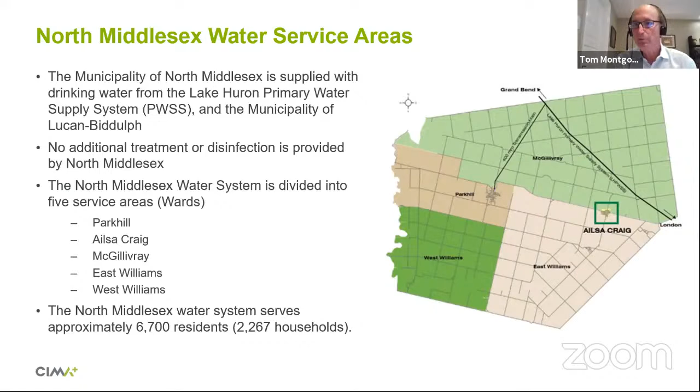So you can see here, I'm just going to try and hide this. There we go. With the map, it shows some of the service boundaries, with Ailsa Craig up at the north end of East Williams. One of the reasons to show you this today is to look at some of the options and potential that this location for water storage could have in terms of emergency supply beyond Ailsa Craig within the service area itself.

The overall distribution system for the North Middlesex water service areas is shown here on the map. There are 5 secondary connections to the Lake Huron primary water supply system, and 3 intermunicipal connections for emergency: an emergency connection to the Thedford water system, the Lucan water system, and South Huron water system. And just a summary in terms of total flow coming into North Middlesex for 2019, the full year, there was 1.35 million meters cubed, roughly 300 million imperial gallons.

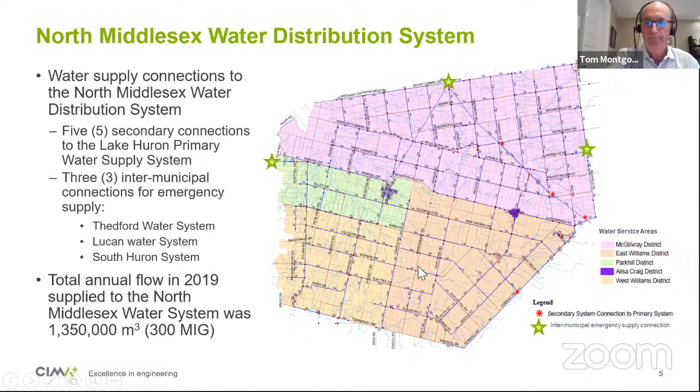With the existing storage facilities, just a recap of what's available today: there are 2 existing water reservoirs that provide storage capacity for Parkhill and West Williams water service areas. The Mount Cameral Reservoir at 450 meters cubed, fairly small, and then the Parkhill Reservoir at about 1,100 meters cubed capacity. There are no water storage facilities for Ailsa Craig and the surrounding areas, which leaves these areas vulnerable to water shortages, pressure fluctuations, and service interruptions during shutdowns of the Lake Huron primary system.

The Parkhill Reservoir on its own has about 12 hours of average day demand storage, during an emergency or scheduled shutdown of the Lake Huron primary water supply system. That's on the assumption that the reservoir is filled at the beginning of that emergency event.

Within the Lake Huron primary system, there are 3 existing reservoirs that provide water storage capacity throughout its primary area. McGillivray Reservoir is about 18,000 meters cubed capacity, one of the larger ones outside of Arva. The Exeter-Hensall Reservoir is about 8,000 meters cubed capacity.

So the McGillivray Reservoir and pumping station is primarily used for boosting water from the Lake Huron water treatment plant to the Arva Terminal Reservoir during high demand periods. The McGillivray Reservoir currently has up to about 12 hours of average day demand storage available during an emergency or scheduled shutdown of the primary transmission main. That's good news, there is storage available when the main pipeline goes down, but it's a matter of how that water storage gets distributed to the customers.

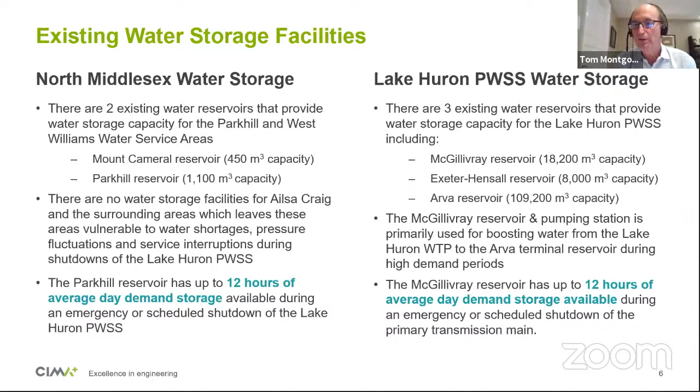Overall, just some information with regards to how many shutdowns the municipality's encountered over the last few years. We put together a list from 2017 to 2019, showing that over the last 3 years there's been 39 emergencies requiring some level of shutdown in the supply system to Ailsa Craig.

The supply disruptions over this period have had major impacts on Ailsa Craig and the surrounding area because there is no storage available. The additional cost over the past 3 years for providing emergency supply to Ailsa Craig and the surrounding areas during those shutdowns is estimated at about $400,000, which is not sustainable in the years ahead.

There's a breakdown of the annual costs that have been recorded with regards to some of the larger shutdowns within the system. Some of these costs include the time for the operator, as well as the cost for hauling in water on some of the larger shutdowns.

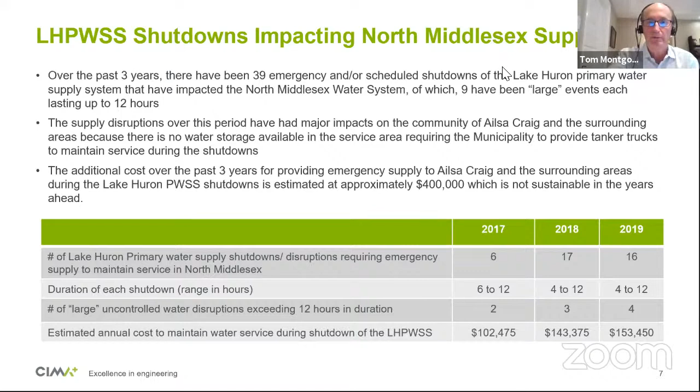So the water storage needs for the supply to Ailsa Craig is currently serviced by an 8-inch water main connection to the Lake Huron primary transmission main, downstream of the McGillivray Reservoir and booster pumping station. As I mentioned earlier, there's no water storage facility in Ailsa Craig for fire protection or emergency supply.

In 2019, the Class EA study was completed for North Middlesex, and that identified a storage deficit in the Ailsa Craig water service area and recommended construction of a new elevated water storage tank to meet current and projected water storage requirements. Based on the 2019 average day consumption record for Ailsa Craig, the minimum storage capacity required to meet ministry guidelines, that's the Ministry of Environment, Conservation and Parks, is about 1,600 meters cubed.

There's a breakdown of the components of that storage. Equalization, that's the working volume within your water storage facility to maintain circulation in the tank and between high and low water under normal operating conditions. You'll have fire storage of 724 meters cubed, based on a level of fire protection by ministry guidelines of about 100 liters per second fire flow for 2 hours. And then there's some emergency storage as well, for 312 meters cubed.

Within the Lake Huron system, they recently completed a master water plan, done in 2020, and that identified a storage deficit of about 700 meters cubed in the McGillivray Reservoir under normal operating conditions by the year 2038. So it's within the design period we're looking at as well.

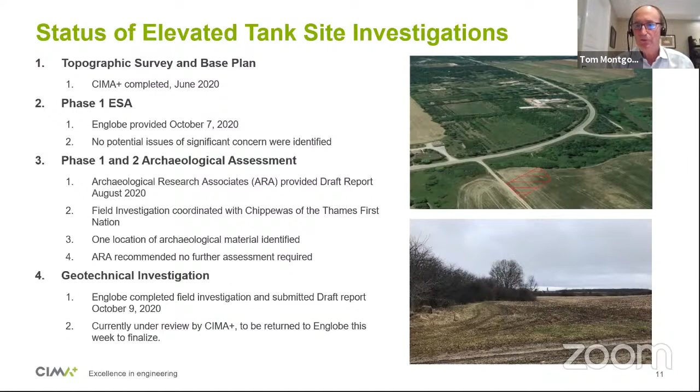That's just an aerial photograph of the site itself and the actual existing conditions of the site where the water tower will actually sit.

So scope of works for the elevated tank, I just put a quick outline here of what we'll be looking at in terms of the contract specifications and the tender documents.

Mobilization and site preparation work, which should be the environmental work, will include topsoil stripping of the site and any removals of brush or trees that are in the way of the structure. Then we'll be looking at the construction itself, an elevated storage tank with a minimum working capacity of 1,600 meters cubed.

That would include a ground level valve room, potentially an upper valve room, piping within the structure and the tank, protective tank coatings, and all related tank appurtenances and accessories.

So we're looking at a 300 millimeter diameter inlet. We'll also have outlet water main connections, valves and appurtenances, and overflow piping, drainage piping, and outlets.

We've also incorporated a bulk water filling station, that's for haulage of water where trucks can come in and fill up with water. There'll be a system established in terms of billing and access to the customers looking to fill up with bulk water. We'll also be looking at instrumentation, electrical, SCADA, and mechanical works.

The site works itself will include grading an overflow retention area to contain some of the overflow from the tank through various operations, yard piping, asphalt entrance, driveway and parking area, some minor landscaping, fencing, and entrance gate. Then there'll be site cleanup and restoration, and testing, commissioning, and final completion of the project and handover to the municipality.

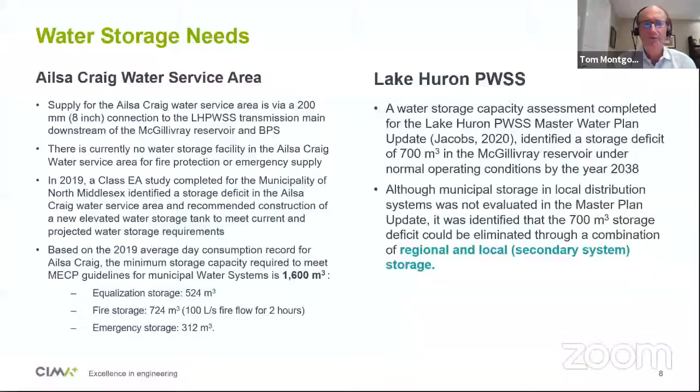Oops, sorry, my finger's a little fast there.

We'll have a new access driveway, which will basically be constructed within the existing easement where the pipeline is for the connection to the Lake Huron primary water supply system.

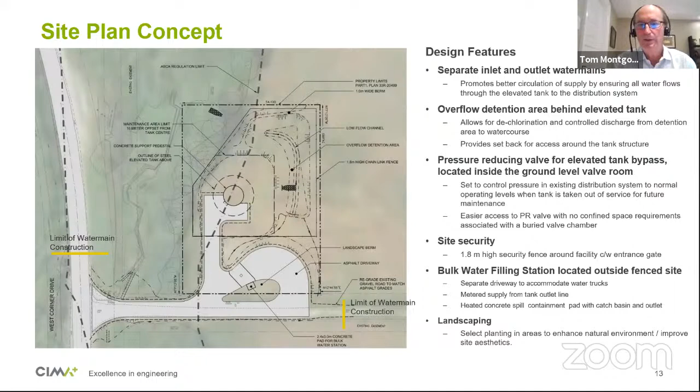And again, the bulk water filling station will have its own separate metered water service connection off the outlet main, so that those customers who want to fill up will be able to record the volume of water used, and then the municipality will be able to bill them accordingly.

So here's an idea in terms of what the tank is looking at, or is proposed at this point. We're looking at a concrete support pedestal supported on a concrete foundation, which will bear on native soil, roughly about 4 to 6 feet below the grade of the existing ground. We'll be looking at a separate inlet-outlet riser, which will take water from the ground through the pipe outside in the yard pipes, and take it right up to the elevated tank.

So the water will come up through those jets and circulate around the entire perimeter of the tank on the inside. And then the outlet portion will be a pipe that'll draw off the bottom level of the tower, and it'll be a separate line. So we can ensure that all the water going through the tower will actually be well circulated, and we will be drawing fresh water out from the tower back into the village. So everything that comes into the tower will go back to the Ailsa Craig community for service under normal operations.

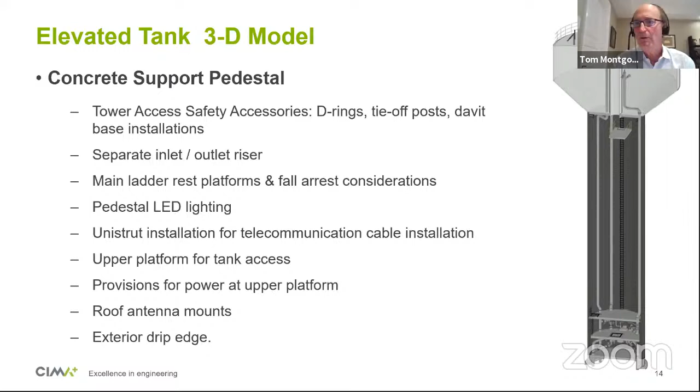We'll have an exterior drip edge on the tank, which will be outside, and the drip edge will likely just be above the cone section in here. What that does is it tends to move any water accumulation on the tower or from the roof, and pushes it away from the cone section and onto the ground. One of the problems we've had in the past with the towers is that if water accumulates on the cone section, it can stay there for a period of time because the sun doesn't always hit it, and you can get a growth of mold and a green color that discolors the tank and makes it look like it's rusting. So the drip edges we put in now around the facility, right around the circumference, help mitigate against that.

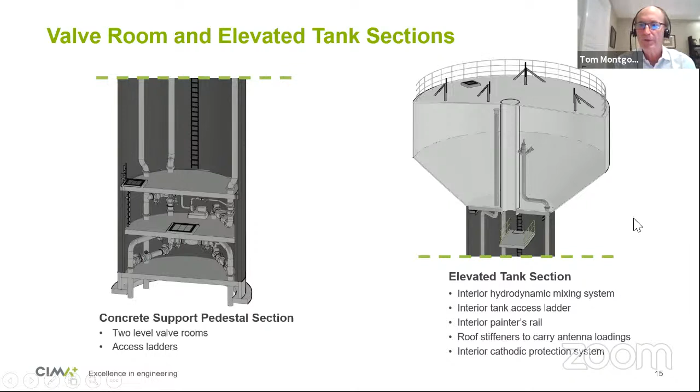We also have an overflow pipe in the event that the tank should ever be overfilled. That would capture the water at this point and take it down a dedicated overflow pipe out to our detention area itself. So some of the features that will be included would be the hydrodynamic mixing system.

There's the interior tank access ladder, which will be from the top, so that you can enter the tank from the top level for inspection purposes in the future. There'll be an interior tank painter's rail as well, so that any scaffolding requirements for future maintenance will be readily hooked up to that system, providing complete access inside and outside the tower itself. We'll also be looking at roof stiffeners to carry the antenna loadings, because there's a lot of wind force on antennas depending on the type. So we want to make sure everything's accommodated for those future installations.

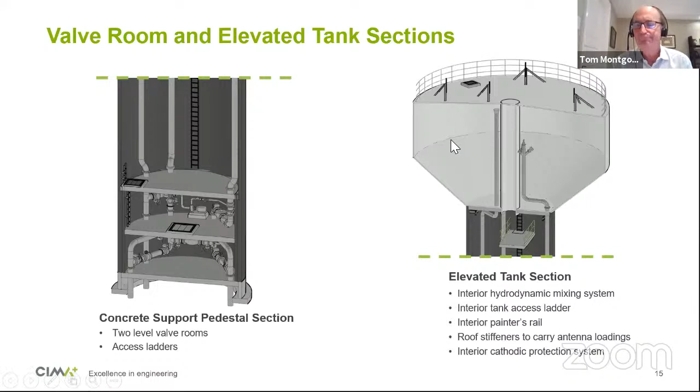We'll also be looking at an interior cathodic protection system. That's a backup to the coating systems, to protect against any type of corrosion should there be any localized failure of the coating inside the tower, or any other potential areas where there could be some rusting in the future.

The interior valve rooms and the layouts we've shown here are just two sort of clips. The inlet tank level control will be on the main pipe coming up. There will be a meter on that line which will record the flow on a regular basis. We'll also have a control valve that will allow us to modulate the flow rate into the water tower, so we can devise separate operating scenarios for winter versus summer operation.

In winter operation, you want to make sure your tank fills at a lower rate so that you get continued mixing within the tower. In the summertime, you're looking at a much quicker fill rate because you've got higher demand, lawn watering, and other issues within the municipality that tend to turn over the tank a lot faster. So we want to make sure we can replenish the water at a much faster rate during those hot summer months. I think I've talked about all the appurtenances already, so we'll move on.

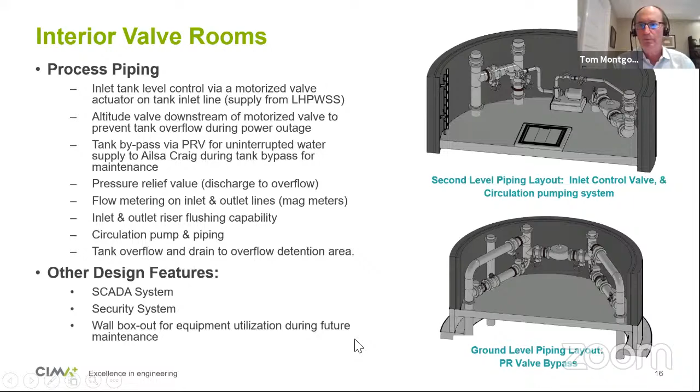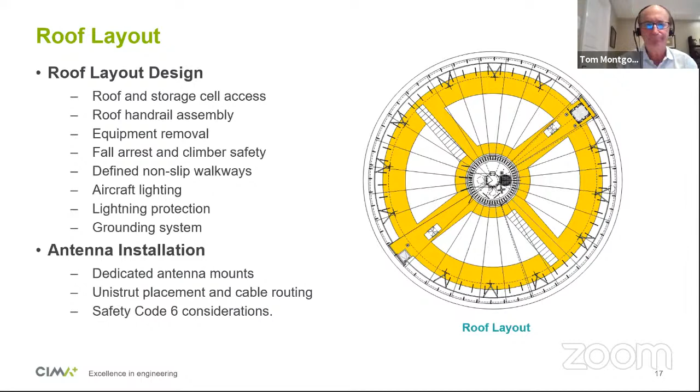Moving forward, we talked about emergency storage considerations. The minimum size requirement for the Ailsa Craig tank, based on 2019 flows, is 1,600 meters cubed, that's 352,000 imperial gallons. For us who remember gallons, that's a good sized tank for the community we have.

But when we looked at the standards for water storage and best practices in the industry, there's a check that's normally done for emergency storage for supplies strictly based on one supply location, such as your pipeline from the Lake Huron primary water system. What's generally recommended in the industry is 2 days of average day demand within your storage facility.

So for instance, if Lake Huron is doing a scheduled shutdown that's going to be more than 24 hours, you would then have enough storage capacity in your water storage facility to last a full 2 days before you would have to replenish any water in that tower. That's a standard used by a lot of municipalities, including the Lake Huron Primary Water Supply System.

Looking through their master plan, they're looking to ensure they can provide that level of emergency storage within their system as well. So if we do provide the full 2 days of emergency storage, it would increase the total storage capacity of the tower by about 300 meters cubed. Not a lot, but it would take it up to about 1,900 meters cubed.

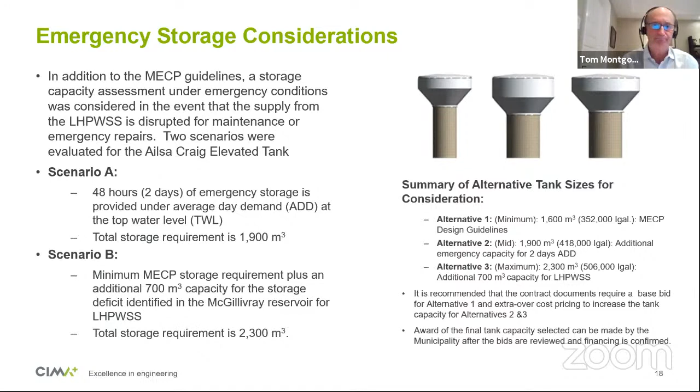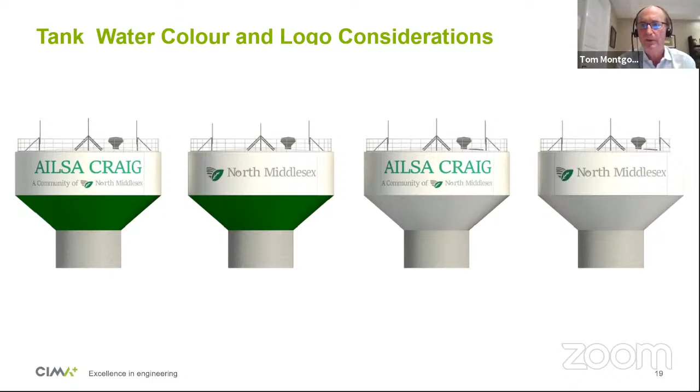I think next I have a small video clip that I'm going to try and present. Just bear with me for 2 seconds. I think I'm going to have to stop this presentation and then just see if I can click on it quickly.

Okay. New share. Boy, this could be a little bit difficult for me to find, but Mike, do you have the video? I do, I can try to share it right now if you like. That would be great if you could, Mike. I appreciate that.

Everyone can see that, all right? Yes, I can. So this is just a small video that shows the configuration for the tower and some of the key features.

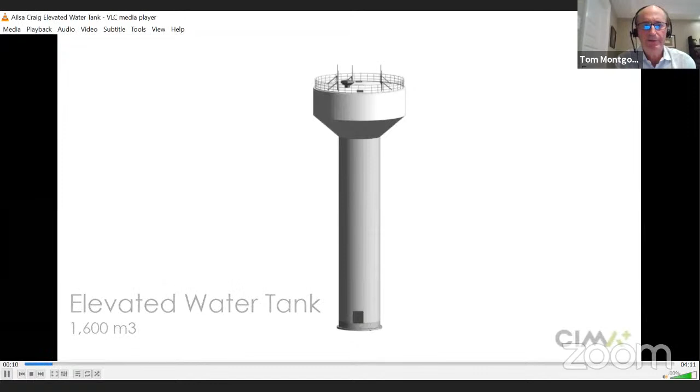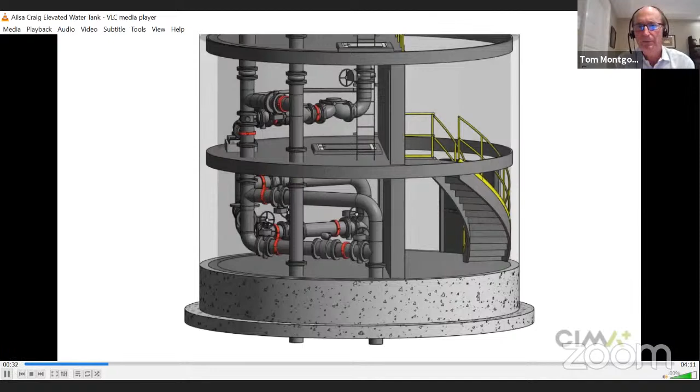The tank itself, this is the 1,600 cubic meter capacity size that we're looking at modeling. Then we have the 2-level valve room. We have the option for a 1-level as well without the staircase, depending on the final configuration we go with. But this would be inside the concrete support pedestal, just to give you some different views of the piping that's required inside.

Quite extensive. It's compact, but very efficient in terms of operations. Everything is metered. We have full control. We have a circulation pump that allows us to circulate on the inlet. There's your water coming in, shown in green.

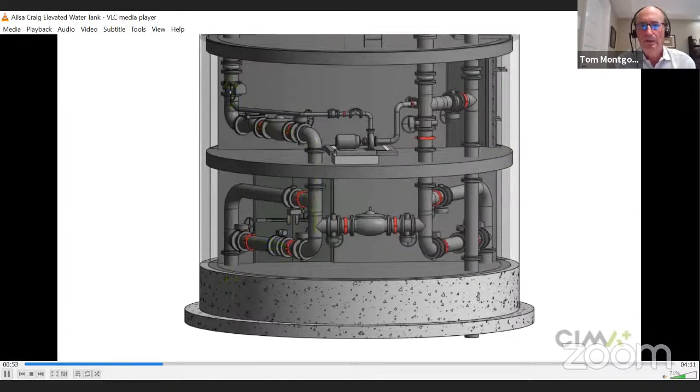So this would be your main flow coming in, and we'd have our main flow going out of our outlet pipe itself and then into the distribution system going towards Ailsa Craig.

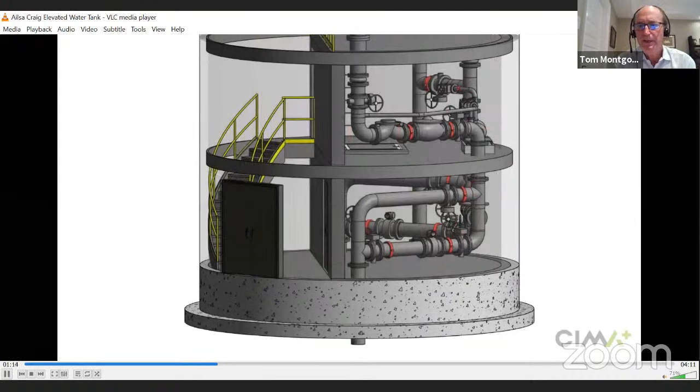And just an overview here of the overall chambers itself. So there's a bypass line in here. Again, we'd be able to bypass the tank altogether and still supply the village at a good rate. So outside the shaft, we'd have 2 main entrance doors to get into the shaft.

And then the tower itself, this is just the structure we get up to the roof. And here's some details of the piping within the concrete shaft itself. Again, the upper platform towards the top goes right across, spanning the inside diameter of the shaft.

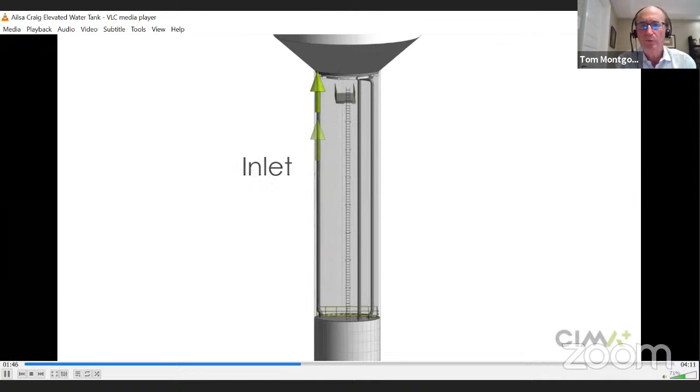It allows for like 2 to 3 people up there under normal operating conditions, perhaps not now with COVID, but certainly in the future. And then you have access to the hatches at the bottom of the tower as well, allowing you to climb right up to the surface of the tower. I think there's just a clip of that coming as well.

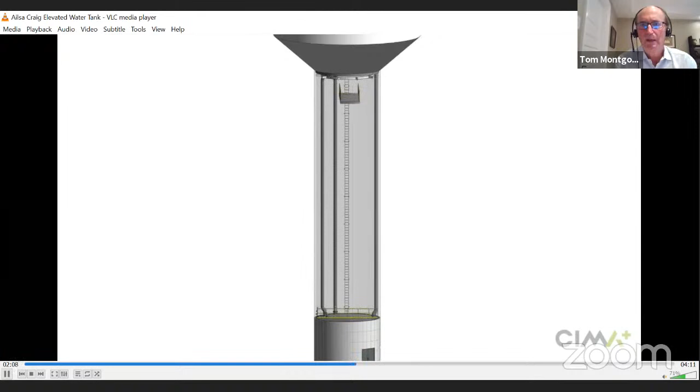Again, these are all modeled now in 3D with the actual contract drawings, but here's how we'd look at the top of the tower as well. There'd be a large vent, and our access tube is grayed out in the middle there. That's the actual tube that you would climb through with a ladder.

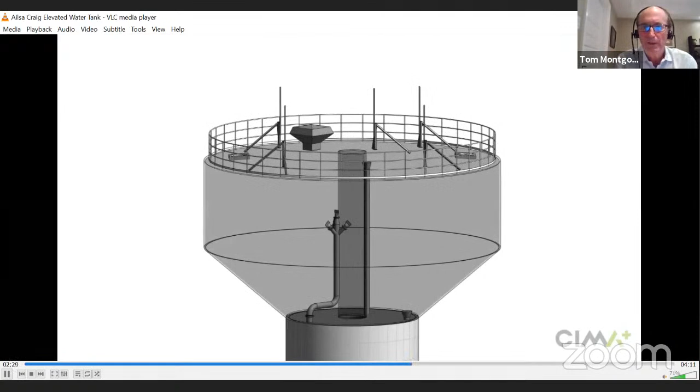And the piping that's shown there is on the outside of the access tube. There's your overflow, there's your inlet pipes coming out showing the direction of flow. Of course, nothing would come out of the tank - it would all be contained and swirled within the top area. And then your outlet would be at the bottom of the tower to ensure good mixing before going out to the customers.

So on the roof itself, we'd have a railing, as I mentioned earlier, with supports out there for future brackets, antennas - lots of opportunities out there. Vents on the tower itself, and at least 2 access hatches for future maintenance and also inspection.

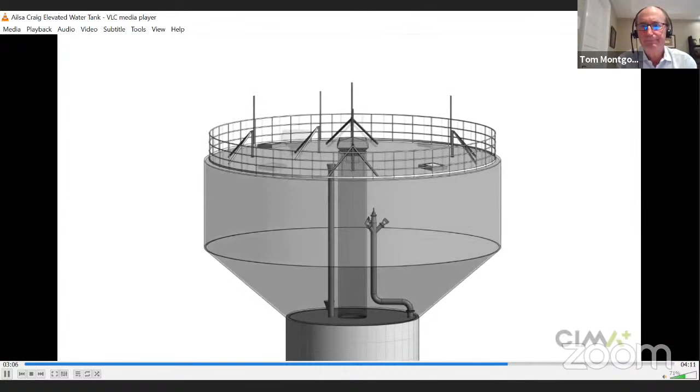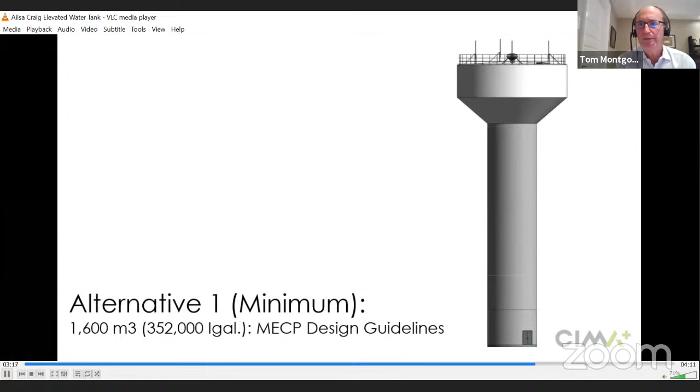I think that would cover pretty well just all that we had on there. We're again going to show 3 sizes in terms of alternatives. Here's alternative 1, and looking at alternative 2, a little bit larger again for that full 2 days of average day storage within the tower. And then alternative 3 being additional storage capacity for the Lake Huron primary water supply system.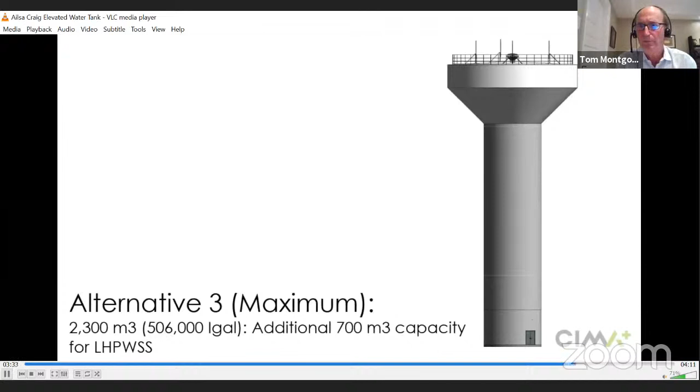There's sort of 3 tower configurations. Final configuration will vary, but generally speaking, here's your capacities. And again, just showing the 3 options there, or 4 options for lettering on the tower. I believe that's it for the video.

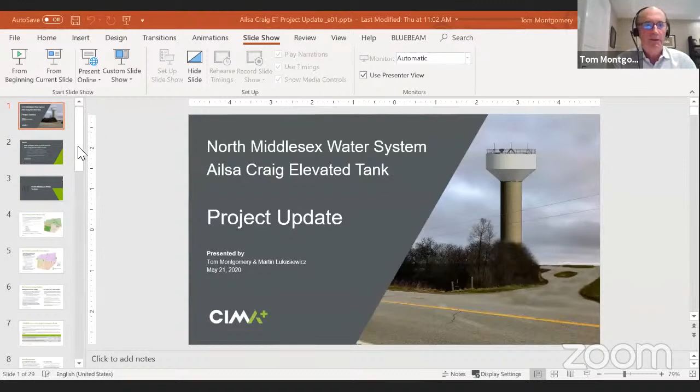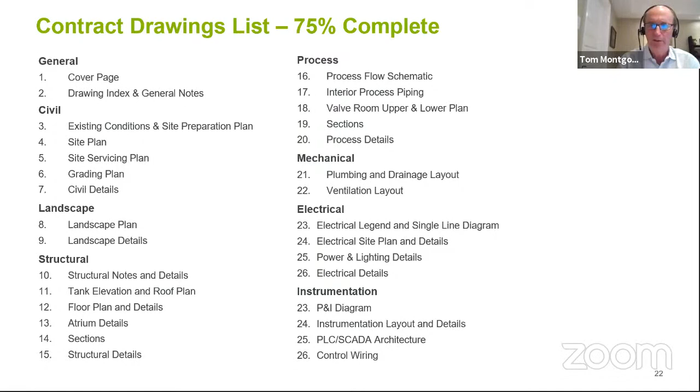And next slide. So status of the design and bid documents themselves. We're moving along. These are the contract drawings that are being finalized right now to 75%. Again, a lot of civil, landscape - very minor, more the grading - mechanical, process, electrical, instrumentation, SCADA controls. We're looking, again, I'll talk a little bit about the schedule.

Want to just talk a little bit about the contract specifications. Again, we follow the American Water Works Association standard for water storage facilities in Ontario. It's a standard D107-10 composite design.

We'll be following that particular code. The code that governs the design of these facilities is the Ontario Building Code, but the standard for these composite designs is the AWWA standard. They are tendered as a performance specification for the structure itself, so the tank design reflects the needs of the municipalities.

Specifications outline the minimum requirements to be priced by the design build contractor in the base bid, and the design reflects the best options for the municipality, not necessarily for the contractor. So specifications ensure we have a durable tank with all operational features provided. But the actual configuration, the cone to shell proportion, the size of the shaft itself, is proprietary to the contractors in a design build.

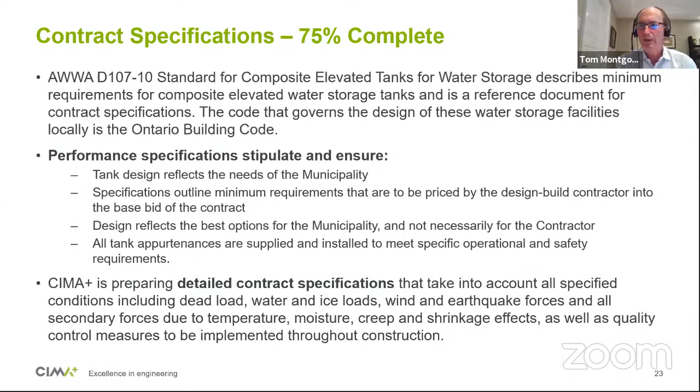However, we do specify all of the design criteria, from wind loadings, weight, and everything else. There are even earthquake loadings specified to ensure the tank will be standing for the next 60 to 80 years without issues. We're preparing those contract specifications and we're at about 75% expected by the end of next week, with everything completed for the bid documents by the end of November.

Again, a note on the design build contract - that is the standard for all elevated tanks in Ontario. There is no other standard we follow. I've done probably close to 30 myself in my history of consulting, and Martin has been involved in many rehabs as well over the last 3 years, if not a little longer.

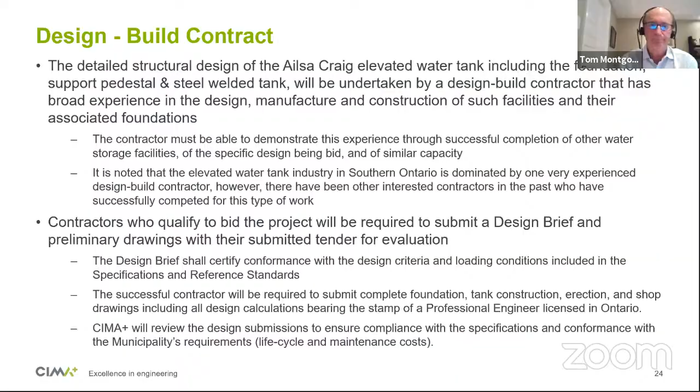So, updated construction cost estimate and schedule. Here's the updated breakdown of our pre-tender or pre-bid, where we are right now at 75% complete. We're looking at, with all divisions included, a subtotal of about 3.6 million for the elevated tank and all the site works. That includes the bulk water depot, part of the water main extension from the tower out to the road itself, and connections to the existing 8-inch main.

If you look at the oversizing for the 2-day average, which would be the second option we're looking at, the 1900, there's probably a premium price of around 200,000 - from about 3.6 to 3.8 million.

And when you're looking at the larger tower to cover the 700-cubic-meter deficit in the Lake Huron system, we'd be looking at just over 4 million subtotal. Then there's provisional and engineering on top of that, so we could be looking at about 4.7 million for the base bid price of the tower. And again, that includes a lot of contingency built in as we are completing the design work itself.

I also noted that we just received the geotechnical report. The bearing soil capacity is not as anticipated initially - it's about half of what was expected. So our foundation is going to be quite a bit bigger, and that's a large percentage of the cost. You'll see that in the concrete work, but it's also carried under Division 13 special construction, which is the elevated tank price itself.

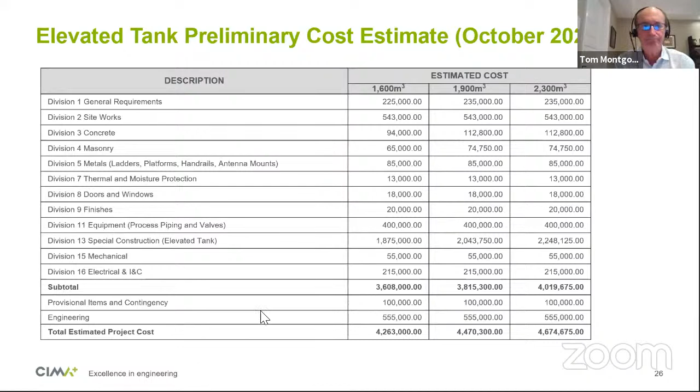And then we did a preliminary cost estimate just for continuing to replace the 8-inch water main on Queen Street, right from the tower site all the way down to Old Highway 7. We're looking at roughly 1.3 to 1.4 kilometers of a 12-inch main. We've carried an allowance of $450 per meter, roughly an estimate of around 1.13 million including HST. Without HST, it's just over $1 million with the engineering, and about a 20% contingency on that as well.

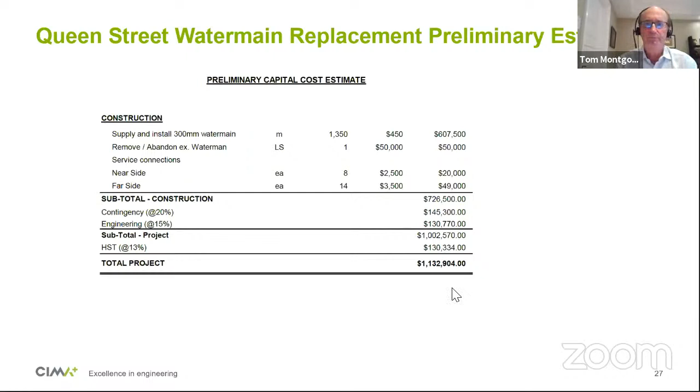So with the updated schedule, we're looking at 75% design submission for the end of next week in October, 100% design submission for the bid documents and contract drawings for November 26. Then we'll be looking for final approvals, a bid call as early as January if council intends to proceed in 2021, with an award likely around March at the earliest, and commenced construction around May 2021. I've got a completion date in here of June 2022.

With elevated tanks, it's possible to complete them in 8 to 9 months, but it all depends on the time of year and weather conditions throughout construction. There's a lot of concrete poured for the foundation and shaft - if the weather is good we can get through relatively quickly, allowing us to set up for welding the tank on site. But what usually causes problems are the winter months, which slow down steel erection and fabrication, and prohibit the painting and coating of the tower.

Generally speaking, we allow for an allowance in there of a shutdown during December, January, February, and then a recommencement back in March with the coating operations completed and the tank filled by the June date. Then we look at a 2-year maintenance period on the tower itself, just to ensure the integrity of the coating system and all the equipment that is being provided.

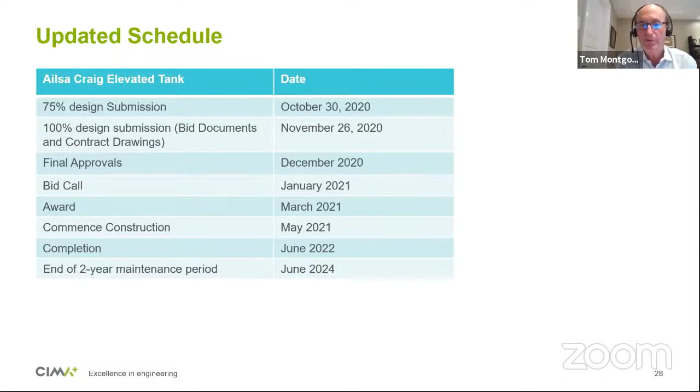So with that, I could open it to questions. Hopefully I haven't gone too long.

If I can get the screen back, we'll go to questions from council. And I don't think you went too long — this is a large project that we have planned, and we need to take the time and make sure we do it right. So, questions from council, who'd like to start?

Councillor Hemming: Tom, just regarding the SCADA equipment and system, will that have to be tied in with the Lake Huron systems as well? So they monitor it too, or no?

The SCADA system itself will be fairly simple for the elevated tank. It basically monitors tank level, pressures, and residuals, and it can be monitored anywhere depending on the final arrangement for the SCADA. That's been subcontracted out to Eramosa Engineering through this contract as well, so we'll be going through that and there'll be lots of options. It could be monitored at the wastewater plant in Ailsa Craig, could be in Parkhill, could be in Aqua, and could also have remote access from all their computers. Typically it's a system that an operator can get into and monitor those levels and operating conditions, and make changes if needed.

So we'll have the ability to open up valves, fill the tower, drain the tower, and do other things as well. We don't need to tie it in with Lake Huron's monitoring system — it'll be strictly independent, but it'll have remote access as well. It'll be the municipality's system 100%.